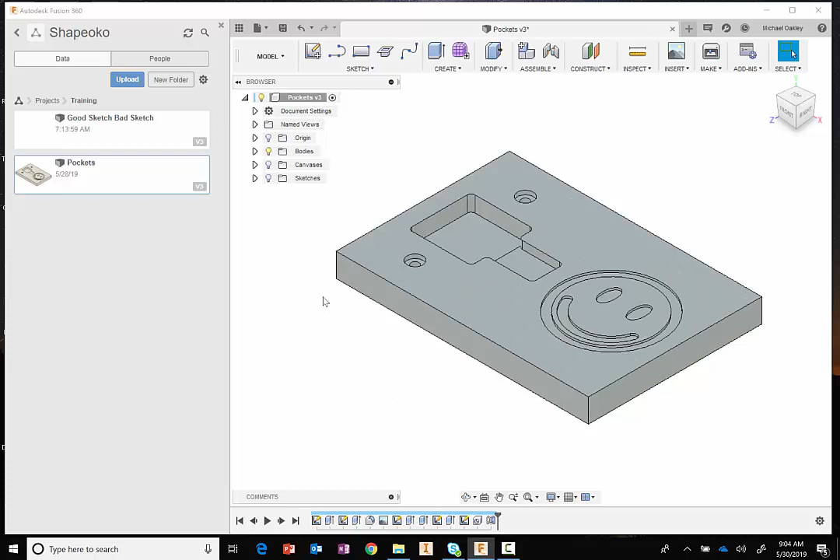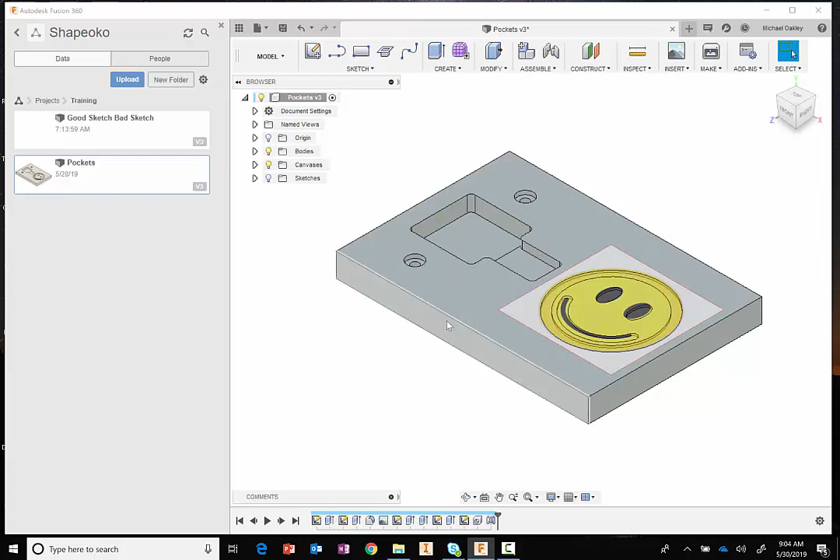I'm going to also show you how you can bring in an image and use it to kind of trace over, to construct this image as well. So these are often a lot of the things that I do with my projects, where I might have a drawing or an image or something that I'm using as a reference point to create some of the geometry that I want. So let's start with this, and we'll finish it up.

Okay, so I'm going to start with a brand new design here. And so when I first got my Shapeoko, the first thing I did is I went to Home Depot and I bought myself a 1x6 common board, which I wanted to use. Just kind of playing around, figuring some things out, figuring out how my tools would carve the material, what types of depths I could cut, speeds and feeds. So I basically went through 2 8-foot sheets of 1x6, just practicing and playing with things.

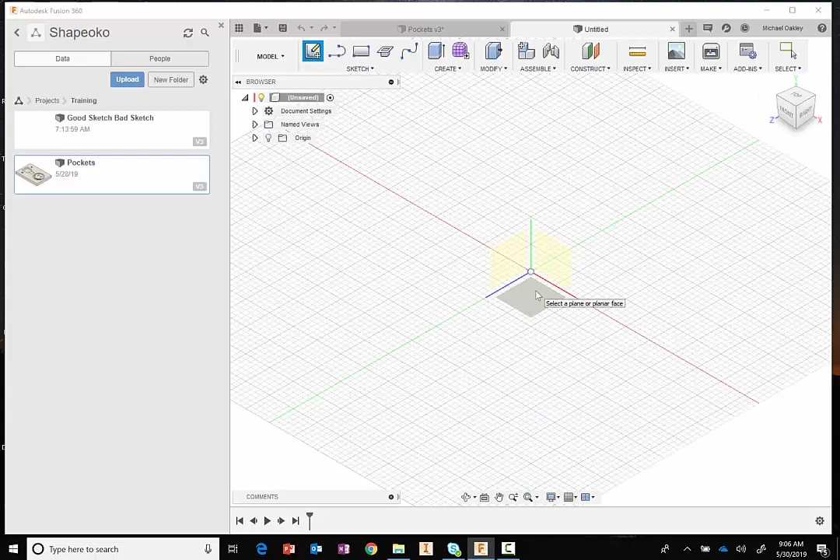And so I think this exercise here is something that you should do when you first get this, before you start attempting your first real project within your Shapeoko. But let's construct that pocket with a smiley face. So again, using some of the techniques you've already seen in the previous lessons, I'm going to start off with a sketch. And I want to have everything centered around this, so we'll use a centered rectangle.

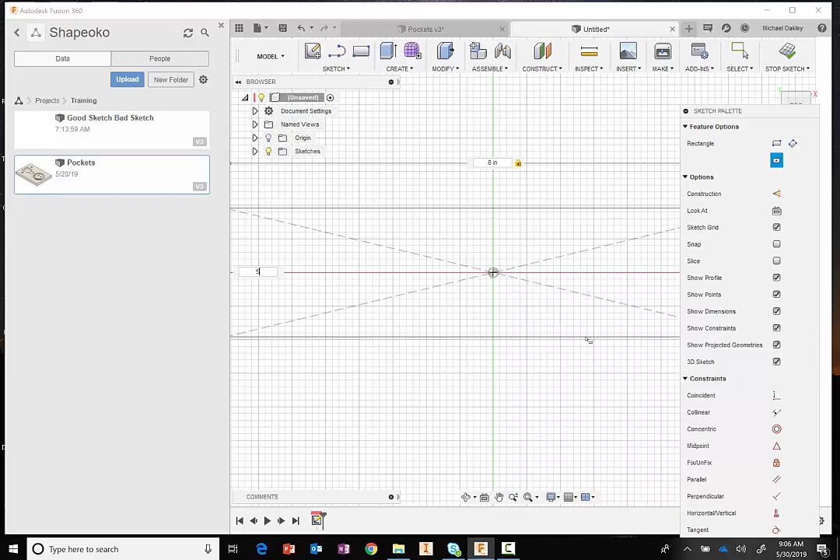And since I'm using a 1x6 piece of common board, basically what I'll do is I'm going to cut this to an 8-inch length, and then that measures 5.5. And then from here it's 0.75 thick, so we'll just press pull this to be 0.75, and now we have our stock that we want to create.

Now once you measure your stock, you may use your calipers to measure the stock, and this may actually be 0.76 or 0.74. And if you don't want to do any kind of facing operations on here, I would change my CAD model to reflect the true dimensions of my physical stock in that case.

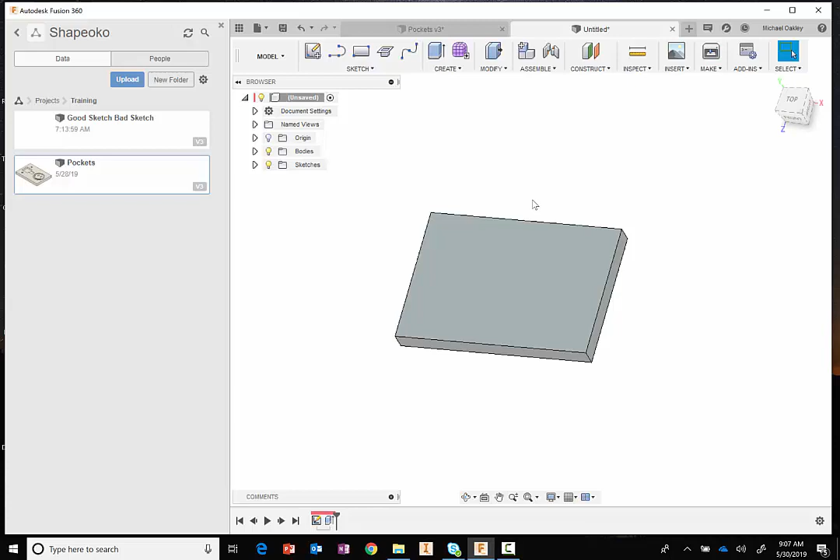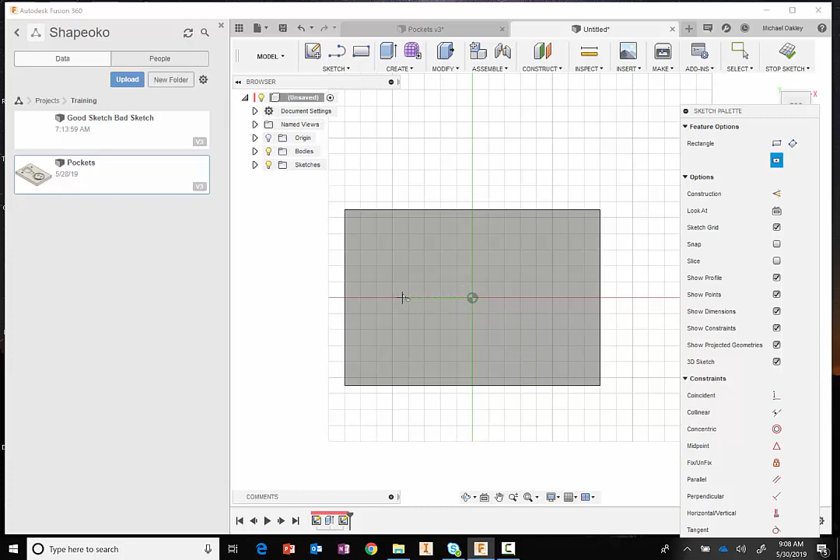Okay, so let's go ahead and create our first pocket feature here. So again, I'm going to choose sketch. I'm going to select on the top plane here. And what I'm going to do is create some more rectangles. And so we'll just do centered rectangle again. Choose this. I'm going to draw a line out this way. I'm going to draw a line out from the center here because I want to use this as a mirror. I'm going to mirror this across.

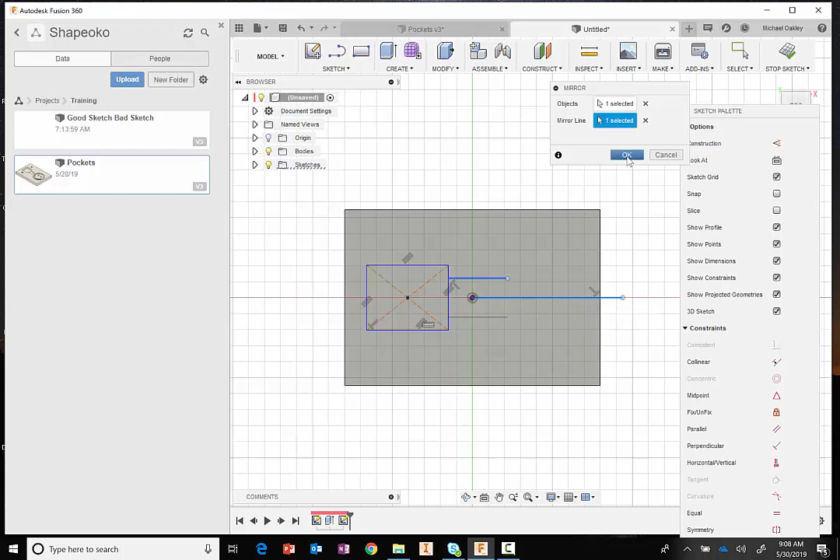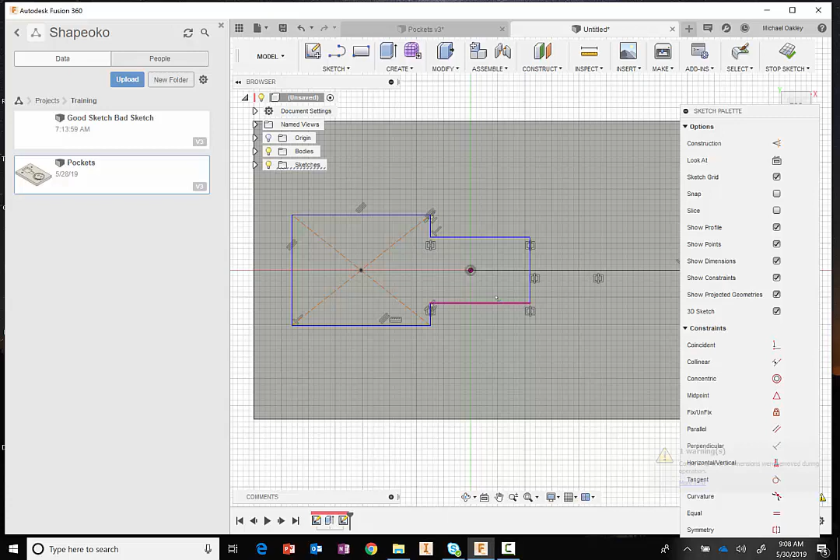Hit L on my keyboard for line. And I have that completed. I'm going to trim this line out just to show you something later. You can leave this in, it doesn't matter, but I'm going to just kind of trim it out. And then we're going to add some dimensions to this. Okay, remember I can choose D on my keyboard. Let's make this 0.5.

Let's make this 2. You can see here that this kind of pulled away from here. So now what we can do to correct that is we can use coincident. So that doesn't work because what it's trying to do is take this from here to here. That's not what I want.

But if I use coincident, use that sketch line and the point, it's pulling that down. So it's important to realize what I was trying the first time was take this point, move it here. It wouldn't do that for some particular reason. But when I chose the line and the point, it moved it down. So now that's going to stay all coincident. Let's go back to dimensioning.

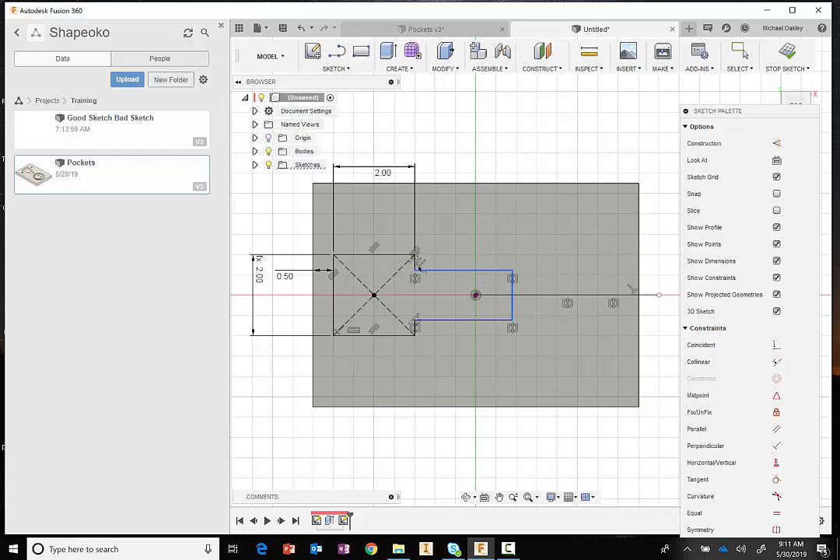And I want to make this 2 as well. So remember a tip from our previous lesson. I can just click on this dimension here and it makes them equal to each other. And then we'll choose this. Let's make that 1.25.

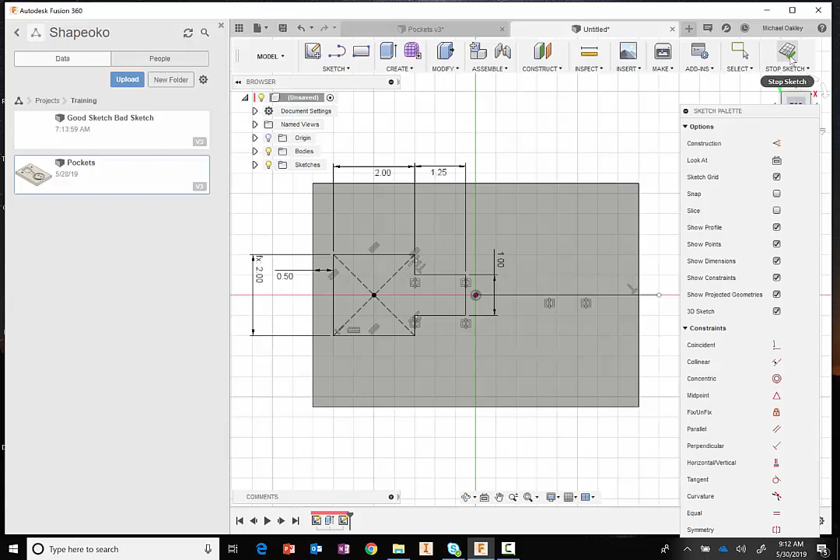And let's make this 1. So there we have the beginnings of our pocket. We'll accept that. We can use press pull to pull this down. And let's make it 0.5 deep. Okay.

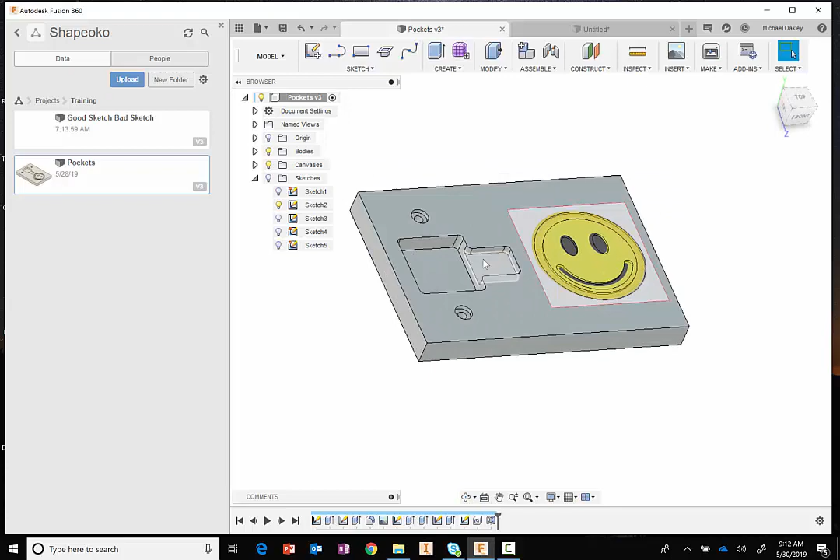So if we go back to our original design model, we see that we have a little step right here. We have fillets in the corner and round. So let's construct that area. Now it doesn't matter if I put the rounds in now or I put the rounds in later, but I want to just show you a couple different things.

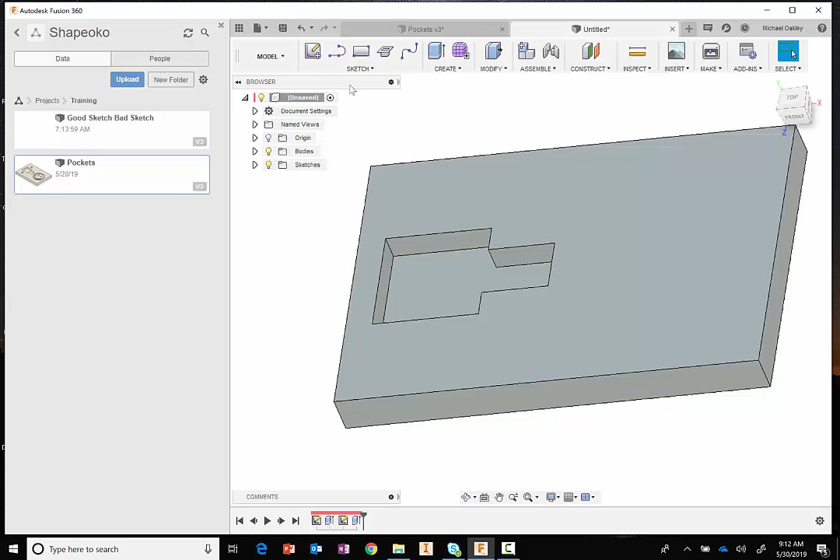So let's go ahead and hit sketch, and I'm going to pick the bottom of this here as well. Now one of the things that's often useful, now I can go to line and I can pick this corner here, no problem. But in some cases you don't have a sharp corner to choose. So that's where using this project feature is often kind of useful. I can click on this line and this line and hit OK.

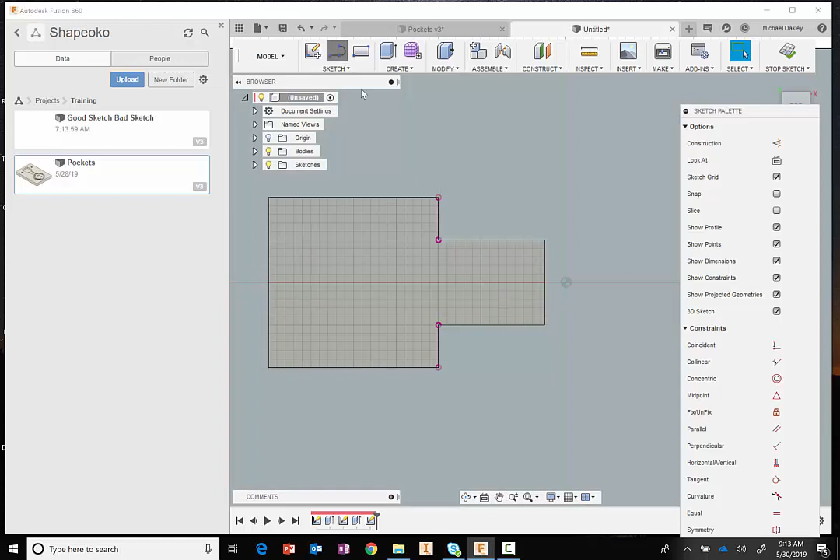And what it does is it kind of builds some, I guess, construction information here, or it gives me information that is selectable. And so now I can choose this line here and pick that other point, and now I've got a closed volume that I can extrude. And so I didn't need to put a line here or on this edge or on this edge. Fusion is smart enough to know that that's a closed region that I can then extrude up a given value.

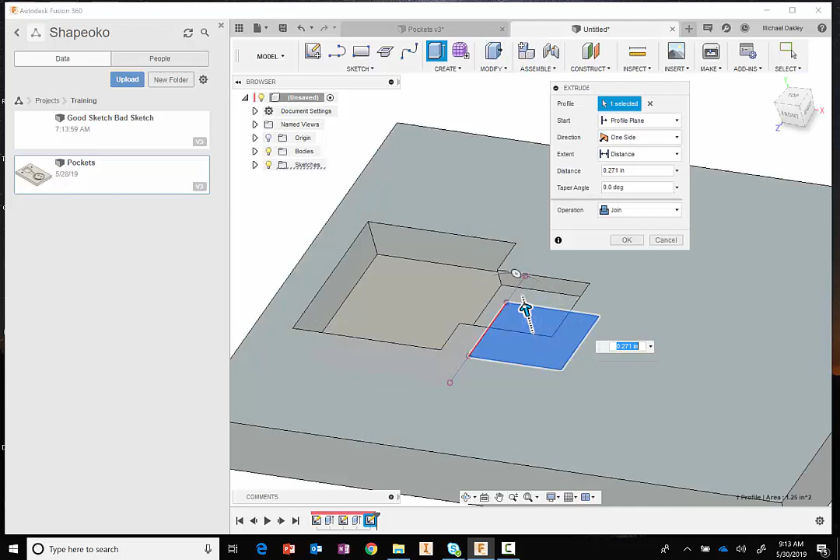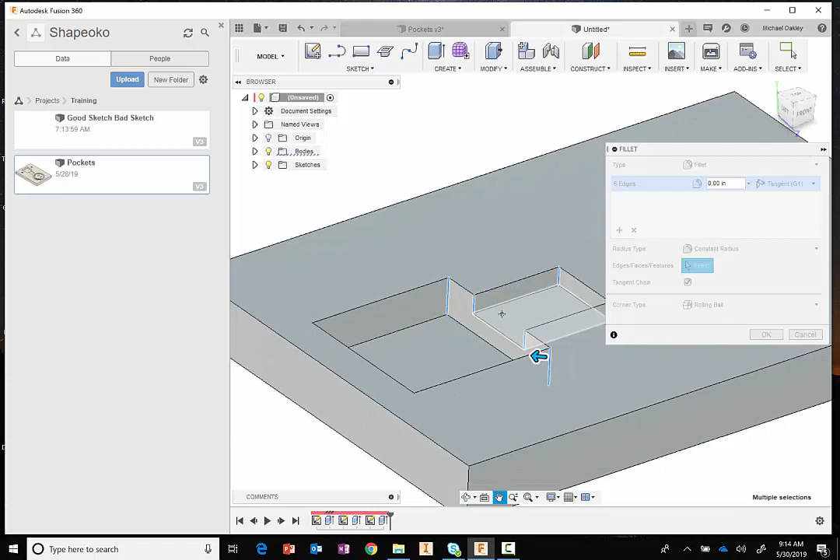Okay, so now I have that multi-tiered pocket. And so now I'm ready to put my fillets in, or rounds. I can choose these edges here. And this is where you might want to be conscious of what type of tool you might be using. So I'm going to use a 1/4 inch flat end mill, so we can put in the radius of that end mill for this. And there we have our first pocket that we're going to machine out later.

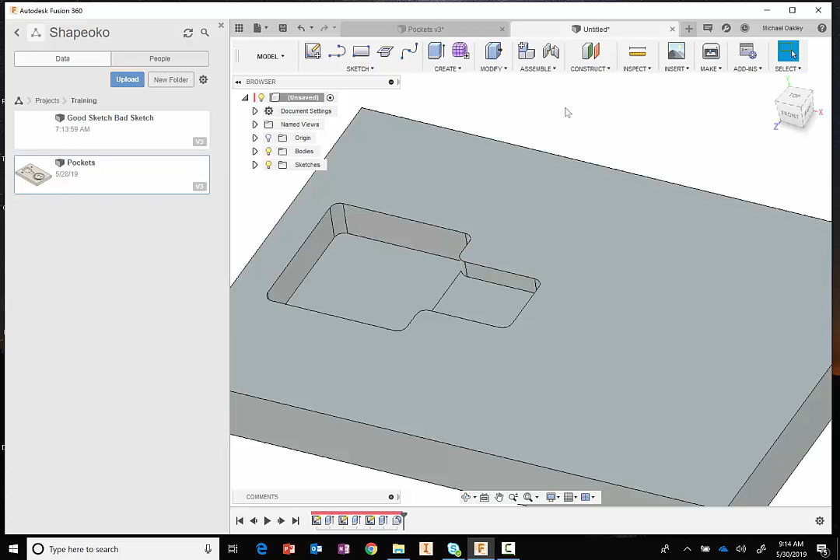Okay, so now we're ready to construct the smiley face. I'm just going to turn this off to get some more space here. So here what we're going to do is choose attached canvas under our insert menu here. And so again, I'm going to pick the top face here. I can select the image that I want. I'm just going to browse to my pictures folder and drop this in.

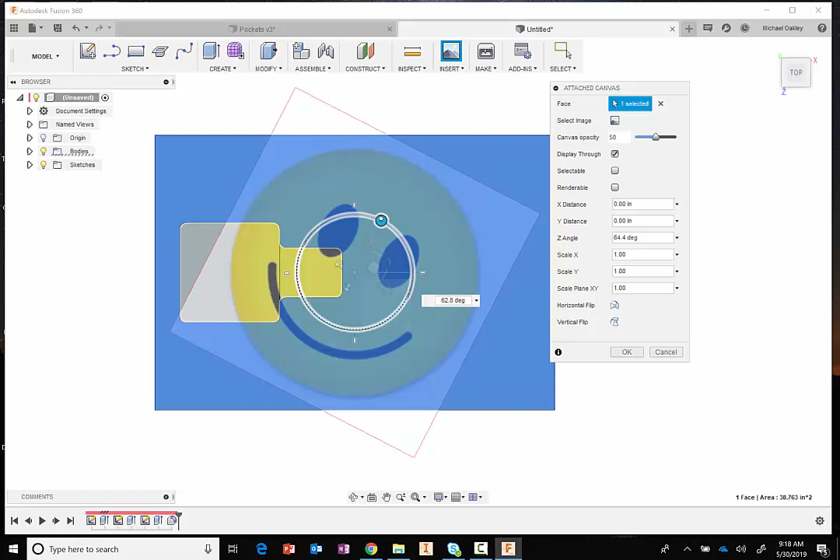Just orient myself into the top view so I can see better what's going on here. I can rotate this thing around 90 degrees. I can kind of drag it over approximately where I want it. And I'm just going to leave it like this just so I can show you something with this image. I can certainly scale it here up and down, but I want to show you a different feature that we have inside of Fusion that might be helpful.

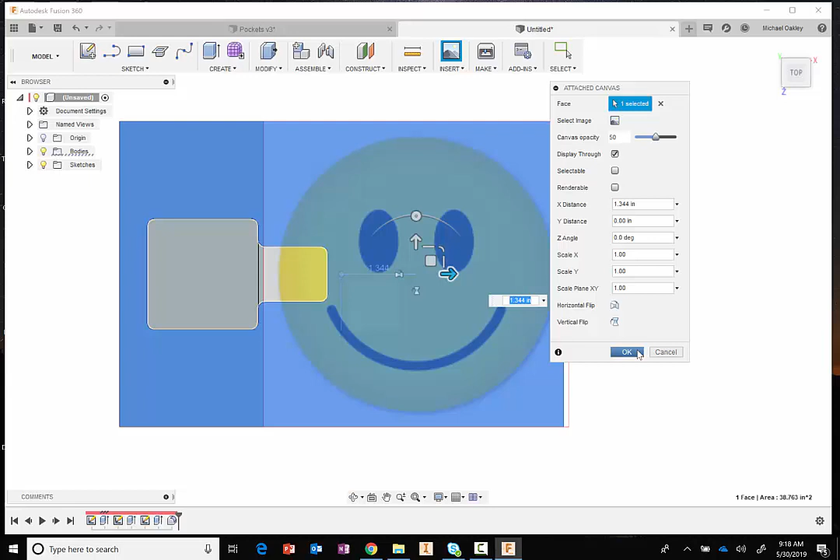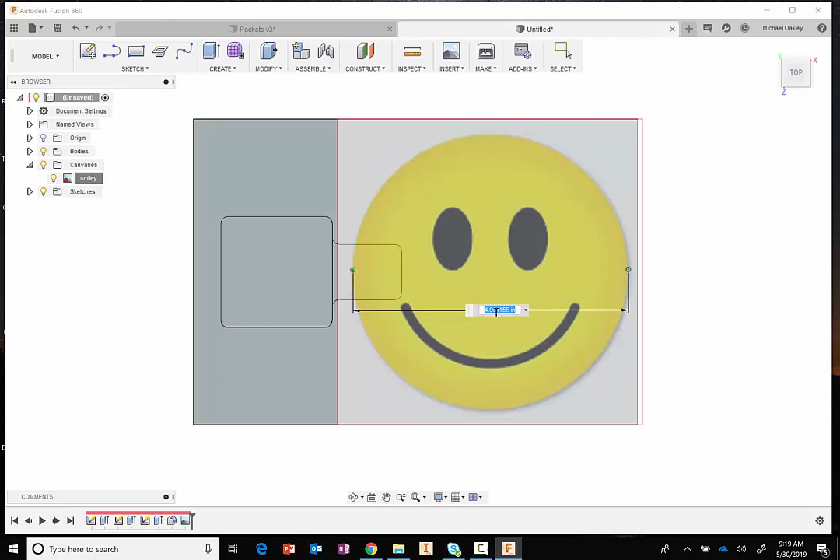So let's say, for example, I want the distance of the smiley face from front or side by side, or the diameter, to be 2 inches. One of the things that I could do here is I can expand my canvases tree here, and if I right mouse click on this, I can say calibrate. And what I can do is pick, get as close as I can here, pick there and say, I know that's 2 inches. And so now what it does is it actually scales that image to give me that true size.

So now when I go into my sketch and I create a circle, let's just kind of get close as we can here. And you can see that as I drag close to 2 here, I'm pretty darn close to what that calibration allowed me to do. So that's a really cool feature within Fusion that allows you to scale those images to get pretty close. As long as you know some kind of distance in that image, you can proportionally scale something.

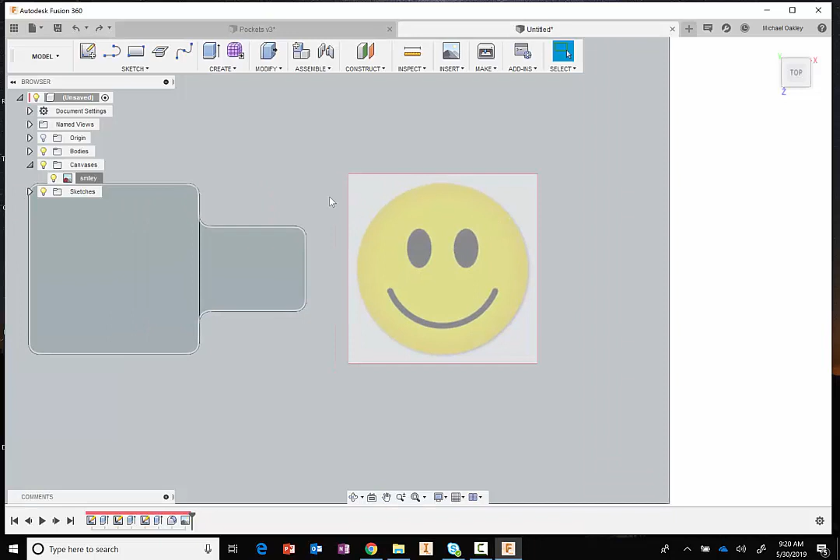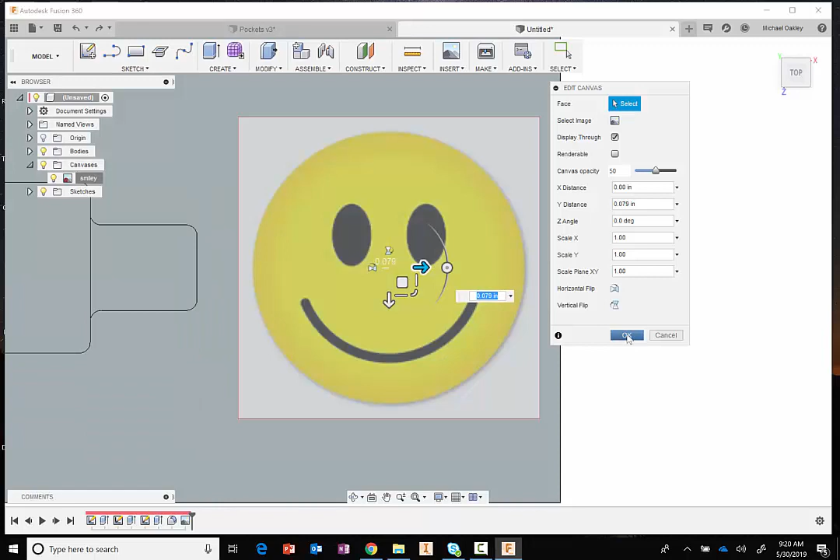I'm just going to undo this and get back out a little bit. One of the things that I just want to do here is just make this as big as possible to use a lot of the space that I have on here. So I'm not too concerned with the true scale as of yet, but I wanted to show you that feature because that's pretty handy when it comes to dealing with images that you drop in.

So now that we have this, we can do anything we want with that. We can trace over it, we can create a sketch. So here I'm going to again go into my sketch. I'm going to construct a circle.

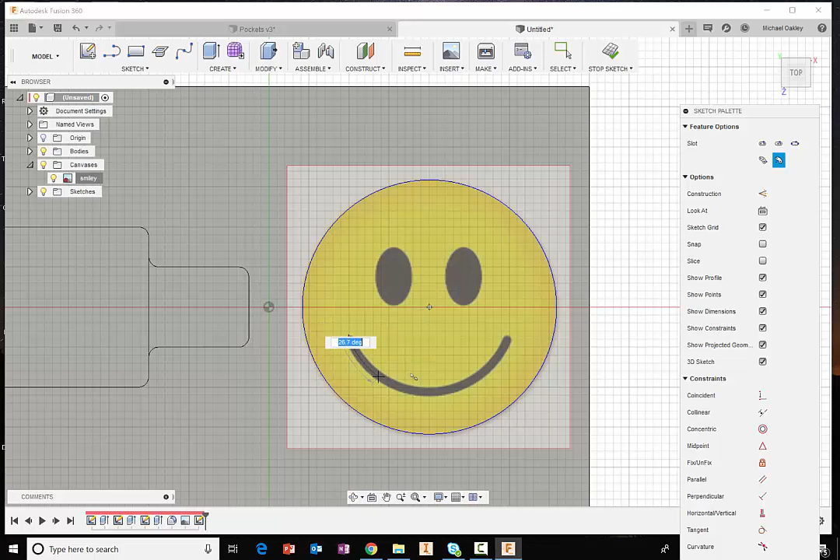Try as best as I can to get close to that, just kind of dragging it out. Here we'll sketch arc. I'm actually going to use a slot, I think, for this. So this is my center point. Start there. And here, looks like maybe I'm going to have a tool kind of drive through there. That's a 1/4 inch tool. And so that looks like that's a diameter dimension. So we'll make that 0.25.

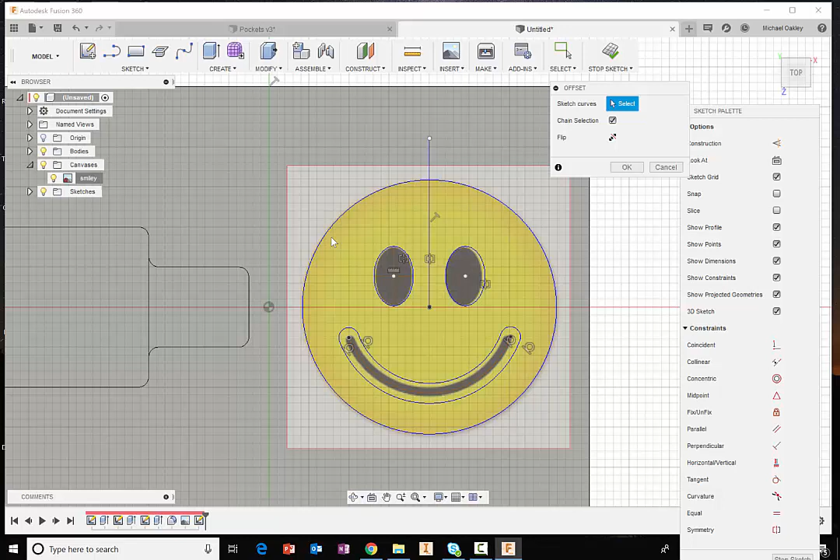And then we'll use our ellipse command to create the eyes. And then of course, we'll go back to our trusty mirror command that we learned earlier as well. And we'll say sketch mirror. Okay, not perfect to the original sketch, but it gives me kind of a guideline that I can work towards. And then what we'll do here is do an offset. And again, I'm going to offset this by my tool diameter. Maybe I want to go outside.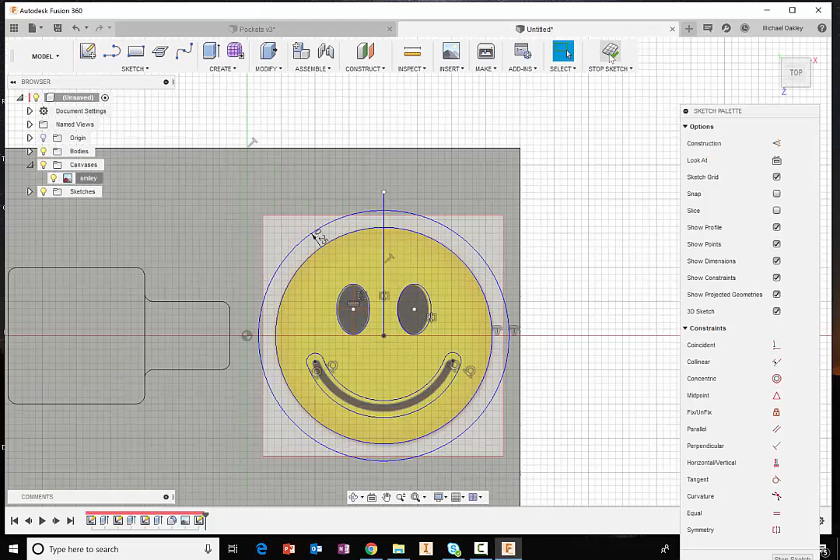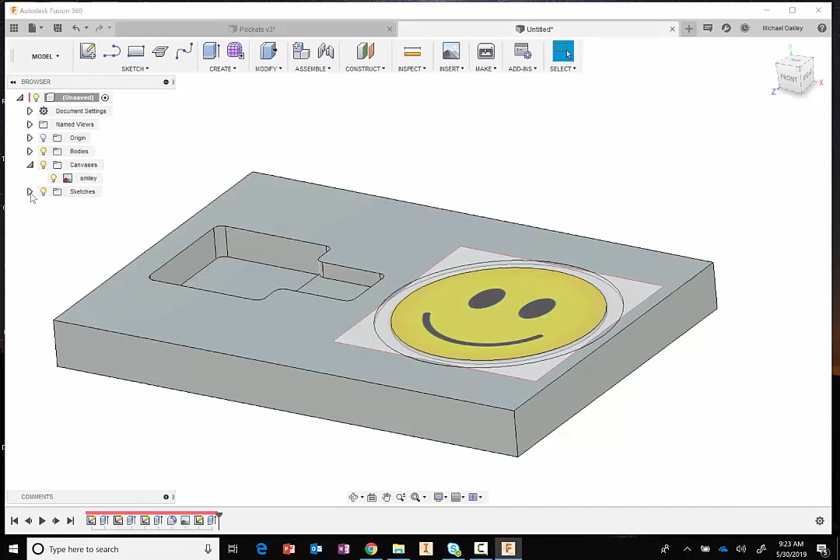And now I'm ready to perform some press pulls. So let's just pull this down. Maybe we're going to just cut that only 1/16 of an inch into the part. Again, my sketch disappeared after that first use. I'll turn my canvas off because I don't need it anymore. So we'll say press pull. We'll get the eyes. And we've got that in place. Okay, so we're partially there.

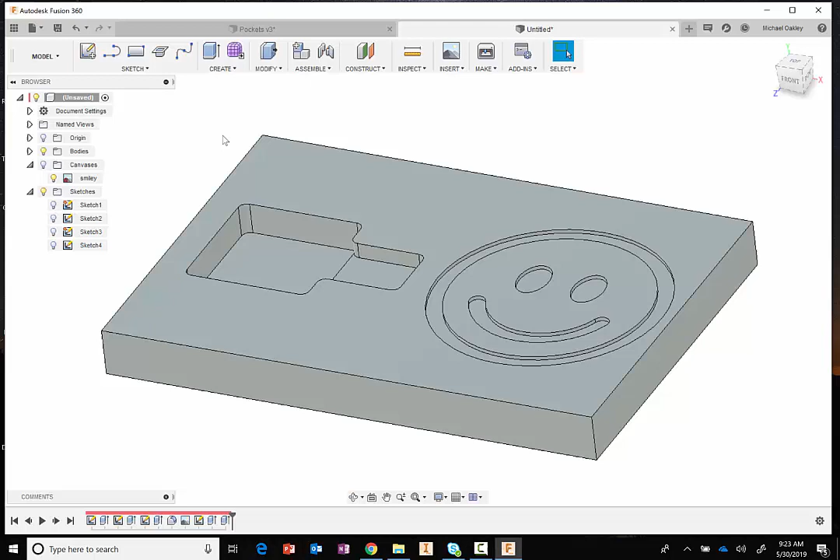So now I just want to put a couple holes in. So once we get to actually making this part, I want to show you how you can drill holes, how you can counterbore, things like that as well. So a couple ways you can create holes inside of Fusion. You can of course create a sketch and then push pull them and end up with your hole. There is a hole command here as well that we can work with. So it's very useful when it comes to creating a counterbored hole. I obviously used this feature when I created my wasteboard, where I had counterbored holes that I machined out.

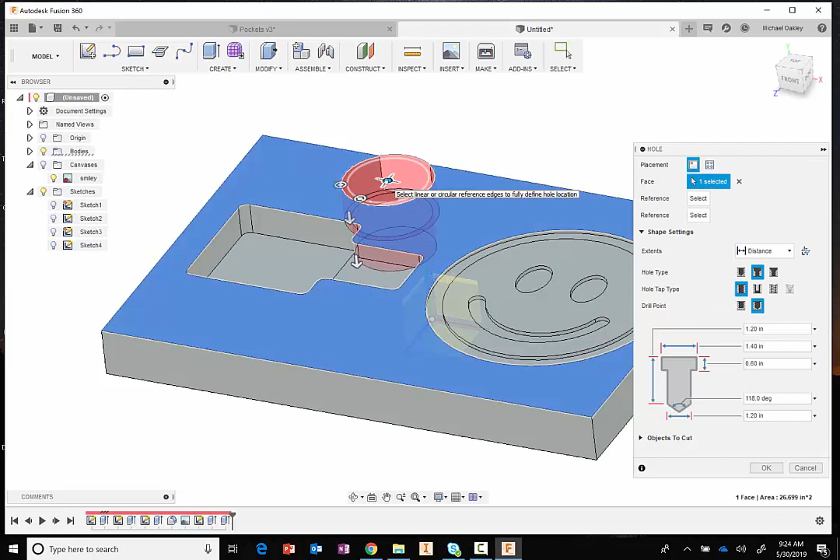There are a couple ways you could place this hole. You can pick the face that you want. You can kind of move it around. You can pick a reference from this edge. We can say 0.5 from this edge. Pick additional references as well, and maybe 2 inches from this edge, and then we can define the actual size of the hole. So maybe we'll say this is going to be a 0.5 diameter. The actual hole is going to be 0.25, which is the tool diameter.

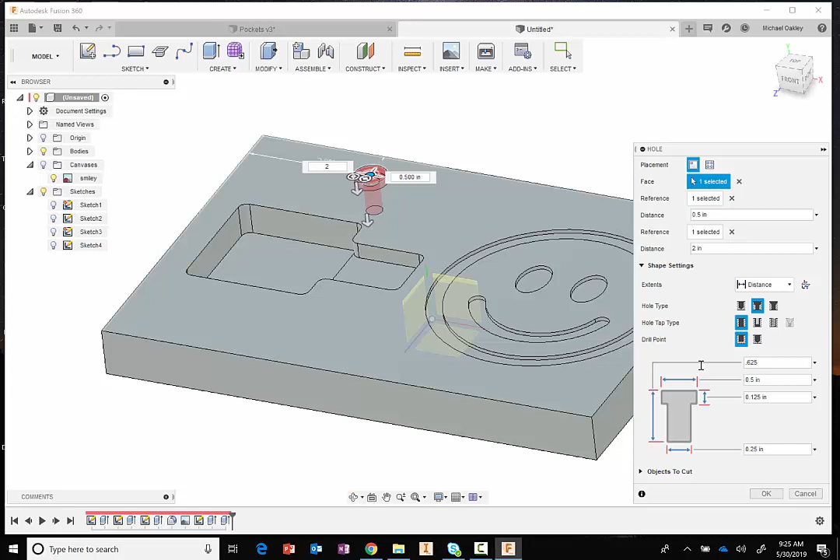And then our depth, we don't want to have a drill point, we just want to have a flat. And so here we're going to say that's going to be 0.125, and then our overall depth is going to be maybe 0.625. So it's not going to go through the entire part. Okay, so that's one way to create a hole. You choose all those options, you position it where you want, and then you create it.

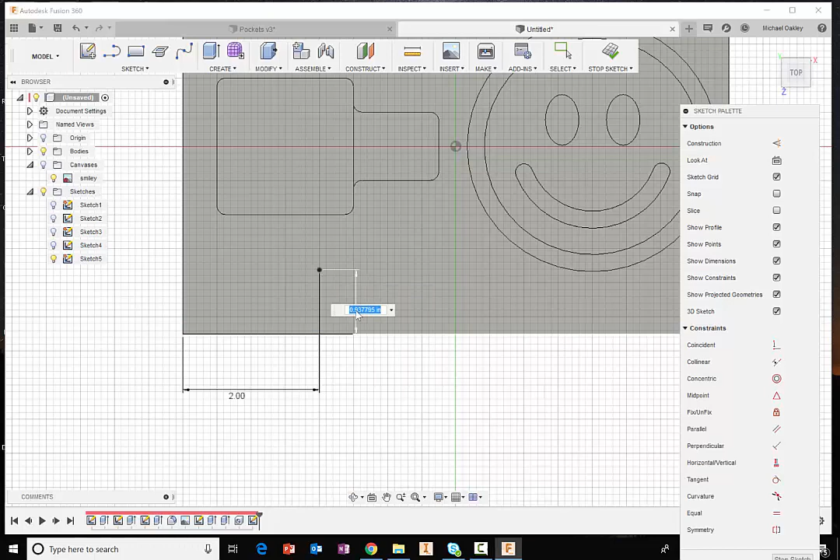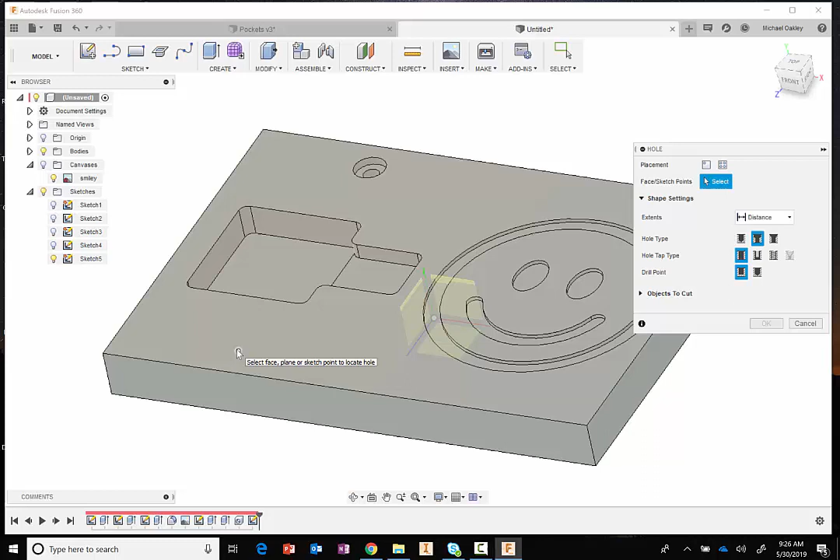Another way to do it is you could first sketch a simple point. And so you could say, let's go in here, let's put a point right there. We could then dimension. 0.5, exit the sketch, and then when we go to the hole command, you can see we can select a point, for example. It remembers that from the previous operation. And what's nice about this is that from a sketch, we can have multiple holes.

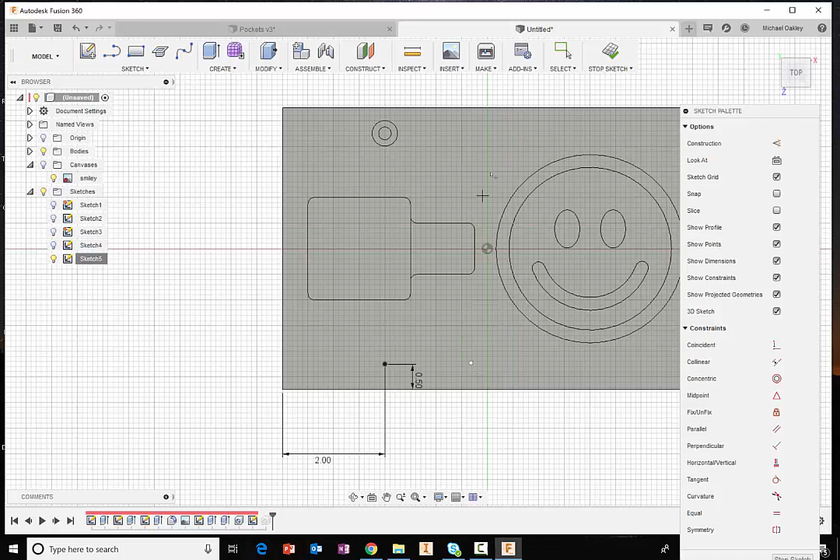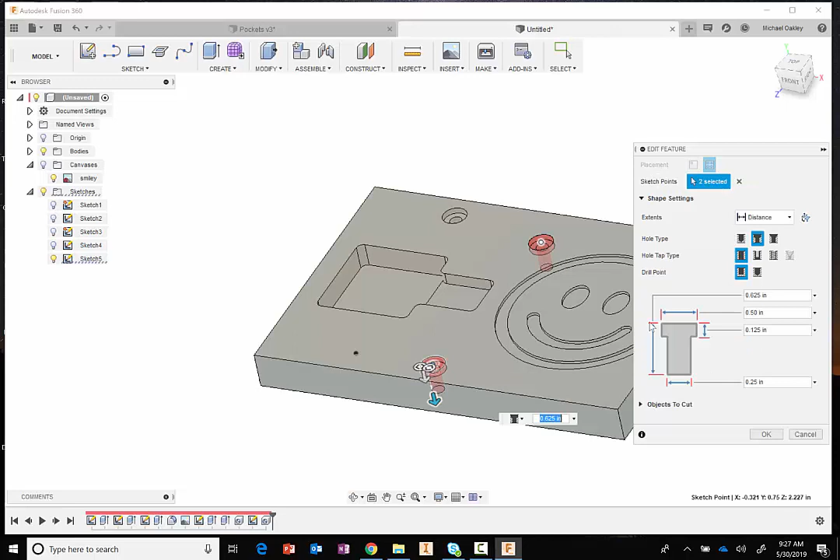So let's go in here. And so let's edit this sketch. Let me just say sketch another point. And we'll just choose all of these guys. And so we can always go back to that sketch and add more points later if we want. So we'll just kind of leave it at that. And so here is our first part that we're going to make on the Shapeoko. So we'll come back and take a look at the tool paths that we might need to create this part.